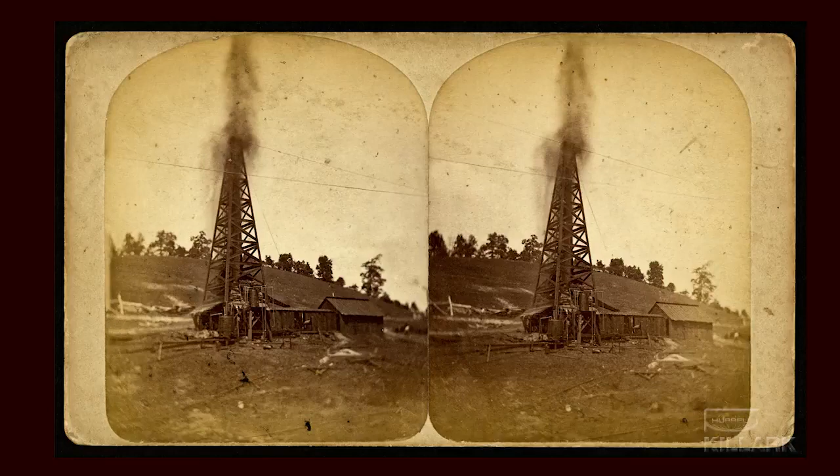Since the earliest days of harnessing the energy available from the commercial development of petroleum resources, understanding the science of fire and explosion has been critically important. Advancement in the process industries that deal with the extraction, refining, and transformation of petroleum, as well as a wide range of other flammable manufacturing materials, has created an ever-increasing demand for controlling the flammability risks.

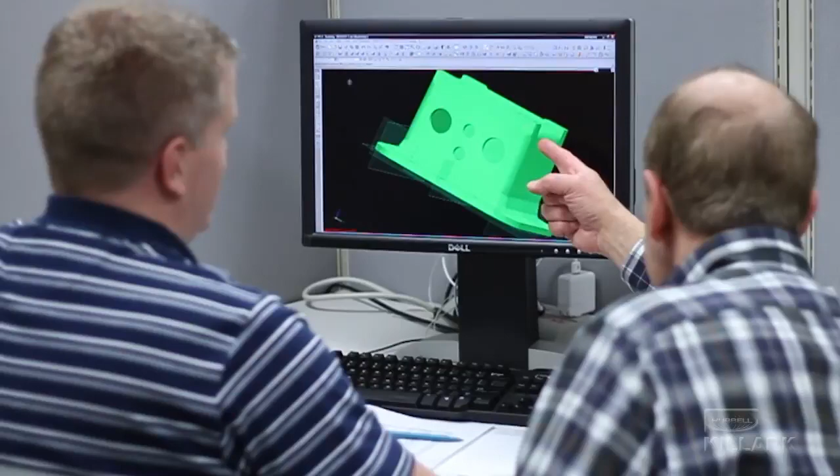One distinct area of concern has been that electrical equipment and its wiring could provide the source of ignition for explosive mixtures. Thoughtful engineering analysis, techniques, and specialty equipment would ultimately be required to effectively manage these risks.

Over the years, many industrialized nations worked within their own economies to develop a national consensus on how to evaluate and classify the risks associated with the extraction, processing, and handling of flammable materials in the presence of electrical systems. The United States, often in collaboration with Canada and Mexico, developed a comprehensive set of rules for evaluating and classifying the risk of ignition from electrical sources in those areas that could have explosive atmospheres. This activity also produced regulations for the techniques and equipment to be used for these installations.

They were then firmly aligned with the specialized product standards that were simultaneously being developed by consensus among industry engineers, technical committees, and third-party certification agencies. The North American approach for classifying the explosion and fire risks in these hazardous locations, frequently referred to as the class and division method, has been collected into a chapter of the National Electrical Code, or NEC, as well as corresponding Canadian and Mexican codes.

Meanwhile, there were also alternative methods being developed in other parts of the industrialized world for dealing with these locations. Certainly, the analysis of the actual risk of fire and explosion would yield the same fundamental results, regardless of approach. But it is the method of classifying the risks and the engineering solutions applied that would introduce additional options in the development of electrical systems.

Largely based on the work of CENELEC, the IEC created a series of standards for explosive atmospheres that have now been embraced in a revision of the Euronorm standards, including renumbering for consistency with the IEC documents.

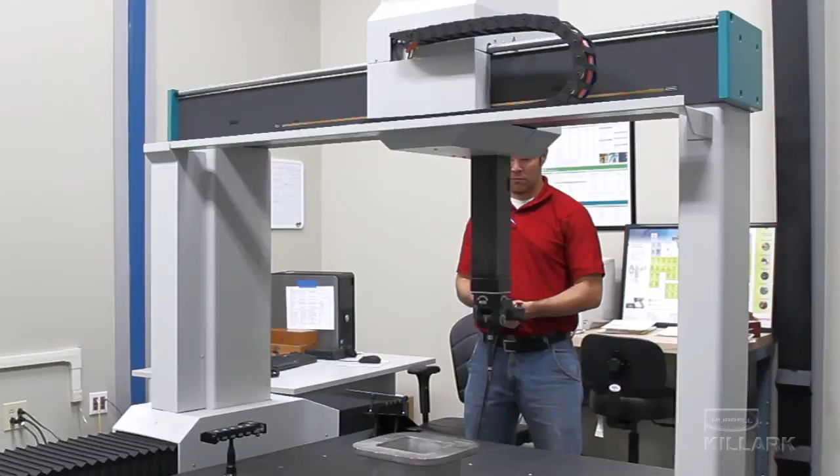An additional effort toward international harmonization was the creation of a comprehensive assessment program that could be used for implementation. Known as the IEC Ex scheme, it provides a structure for authorization of certification agencies, called notified bodies, to conduct examinations of products and manufacturing processes.

The notified bodies would also conduct evaluations of the manufacturer's quality systems and controls, including the scrutiny of follow-up audits. The all-important test reports and certificates of conformity issued by these agencies provide the documentation for product nameplates and marking.

Support for global harmonization continues to grow. The UN, through its European Economic Commission, promotes and encourages adoption of IEC standards and the IEC Ex certification scheme among the Commission's 56 member countries.

And in North America, IEC standardization has also received validation. Although the United States, Mexico, and Canada may be at different stages, revisions to each country's national standards over the past several years have included the path toward harmonization.

For the United States in particular, progress toward harmonization led to the adoption of two new articles in the National Electrical Code, Articles 505 and 506, as alternatives for treating hazardous locations. These articles are very much in line with IEC standards.

Part 2: Treating the hazardous location.

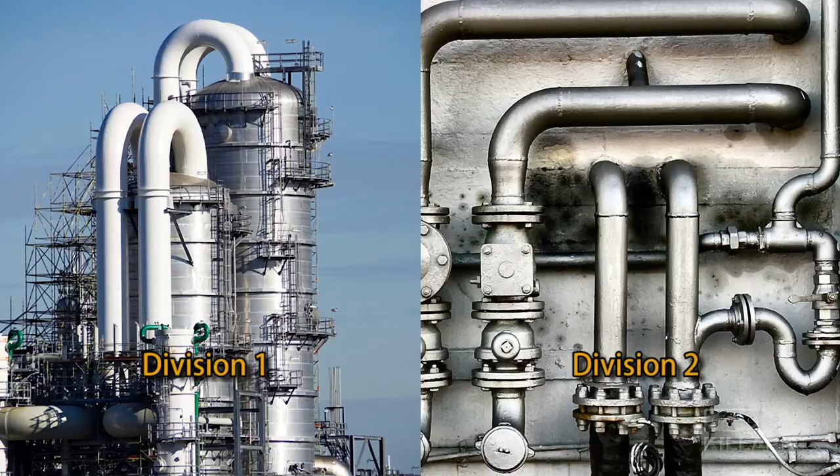The first, Division 1, includes locations where normal operations could permit the flammable material to form ignitable concentrations in the atmosphere, either some of the time or perhaps even all of the time. In contrast, Division 2 describes locations where hazardous materials are stored, handled, or processed in ways that are unlikely to create ignitable mixtures when everything is operating normally.

IEC 60079, the principal underlying standard for harmonization, uses a similar concept for categorizing risks, but it splits the risk of ignitable mixtures during normal operations into two separate categories. Calling the categories zones, the IEC approach starts with Zone 0, defined as those locations operating normally that could create ignitable concentrations of gases or vapors continuously or for long periods of time.

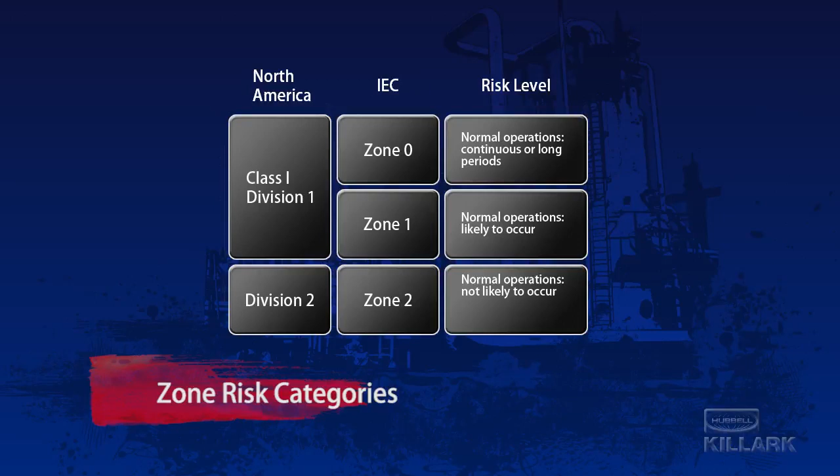Secondly, there is Zone 1. This zone could still be expected to create explosive concentrations during normal operations, but not often enough or long enough to require a Zone 0 designation. The final zone, Zone 2, is identical to its North American equivalent, Division 2. Explosive concentrations are not likely to exist in the atmosphere under normal operating conditions, but failure or abnormal circumstances could cause a temporary risk of a flammable atmosphere.

While the intention of the risk categories is certainly clear enough, those with the responsibility for conducting site evaluations or plan reviews to determine which risk category should be assigned often prefer to use a more quantitative analysis. There are unofficial numeric parameters that frequently serve as guidelines in the classification process.

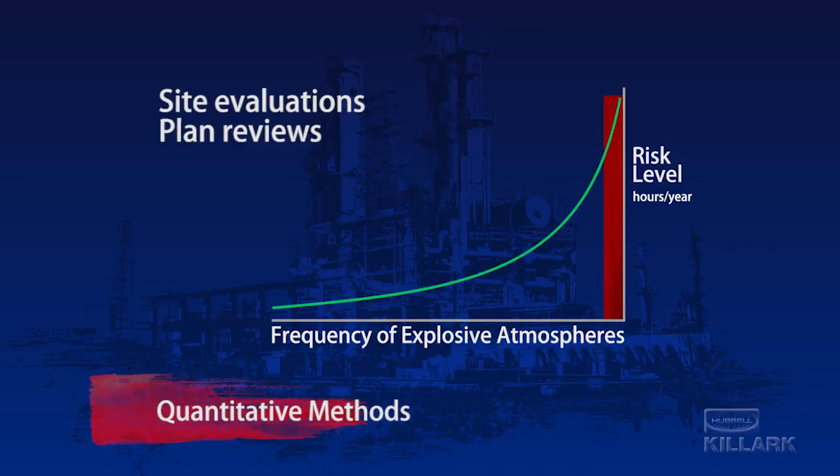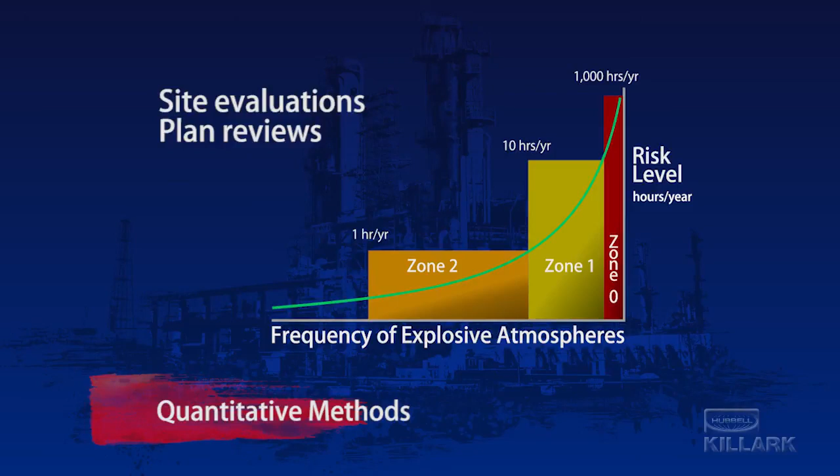When the occurrence of ignitable atmospheres exceeds 1,000 hours per year, the risk would be judged to be Zone 0. Locations considered Zone 1 could experience explosive atmospheres between 10 and 1,000 hours per year. When the issues occur less than 10 hours per year, the designation would be Zone 2. Of course, these parameters must be adapted to local practices, experience, and circumstances.

Since it has a very important impact on the equipment that will be selected for the application, the risk analysis or classification of the hazardous location must also include information about the nature of the hazardous material that could be present in the atmosphere. Gases, vapors, and flammable liquids are assigned to groups based on the similarity of their explosion characteristics to the typical material used to represent the group. Within the North American class and division system, Group A is represented by acetylene, Group B by hydrogen, Group C by ethylene, and Group D includes materials comparable to propane.

The zone system has a similar method for dividing these hazardous materials into groups using the same explosive properties, but the letter designations are the reverse of those used with divisions. In this case, both acetylene and hydrogen-type materials are grouped together under the designation IIC. Materials similar to ethylene are Group IIB, and those with explosive characteristics corresponding to propane are designated IIA. The Roman numeral II, appearing before each letter, indicates that these groupings of gases and vapors are not the result of underground mining. The special requirements for mining use the Roman numeral I.

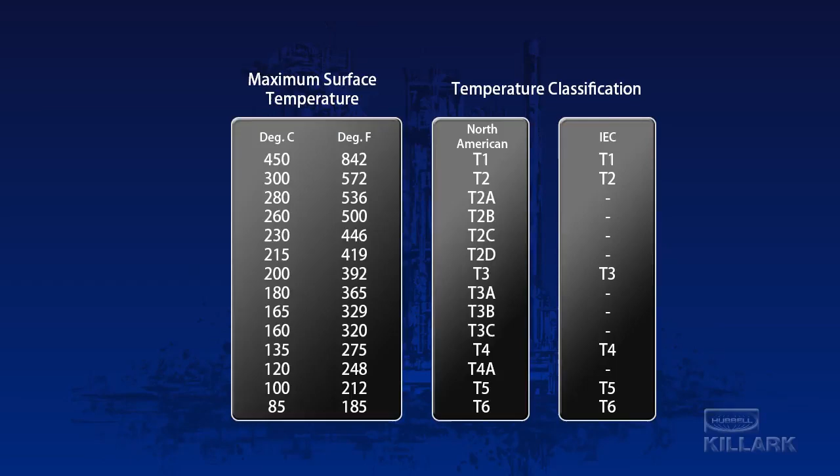Part 4. Methods of protection and equipment for gases and vapors.

Recalling that the fire triangle brings together the three essential components for combustion to occur—fuel, oxygen in the air, and a source of ignition—it is now possible to begin addressing the explosion potential identified during the risk analysis. A variety of approaches are available for the design of these specialized electrical installations, made possible by alternative protection techniques that provide equipment options for specific hazardous locations. The range of protection techniques can restrict the presence of the combustible mixture, isolate or reduce the energy of the source of ignition, or safely contain or quench combustion that could be initiated by the electrical device.

Within these general approaches, there are four basic concepts of protection, each with one or more engineering solutions. The individual solutions have been assigned a simplified type symbol to make identification and specification easier and more consistent.

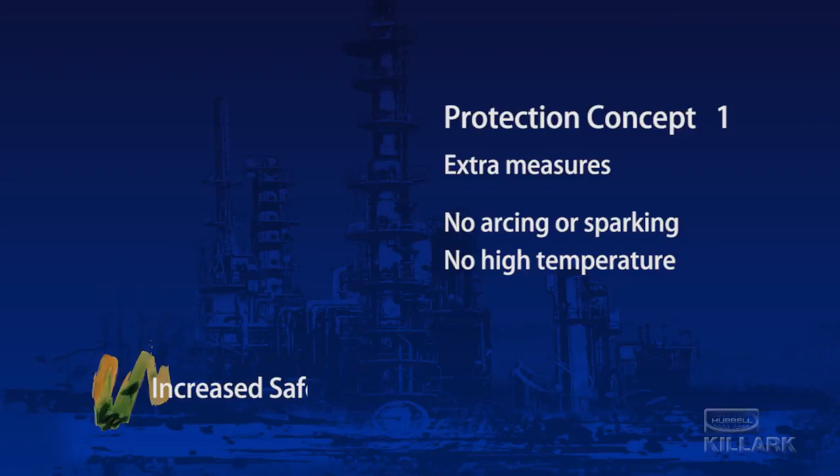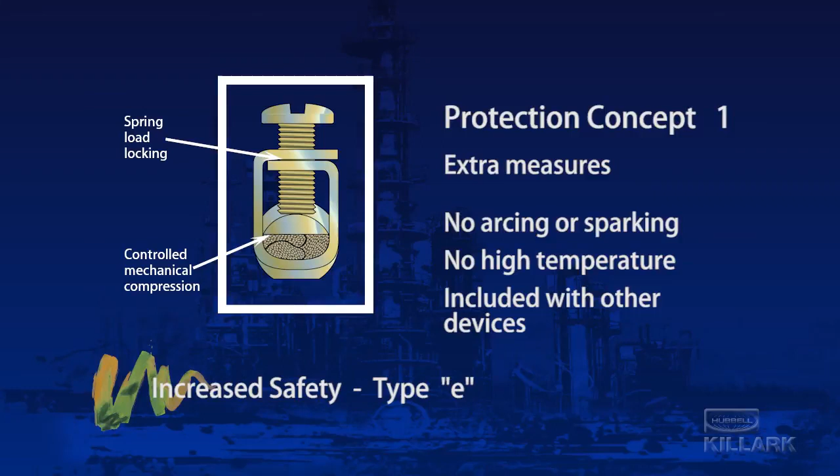The first concept includes equipment that has been constructed taking extra measures to produce no arcing, sparking, or high temperatures. These are known as increased safety devices, Type E. The use of additional clearances, spring-loaded terminations, and physical protection provide a method that can be applied to standalone terminal and connection boxes, or in conjunction with other methods such as those used for controls, motors, and lighting fixtures.

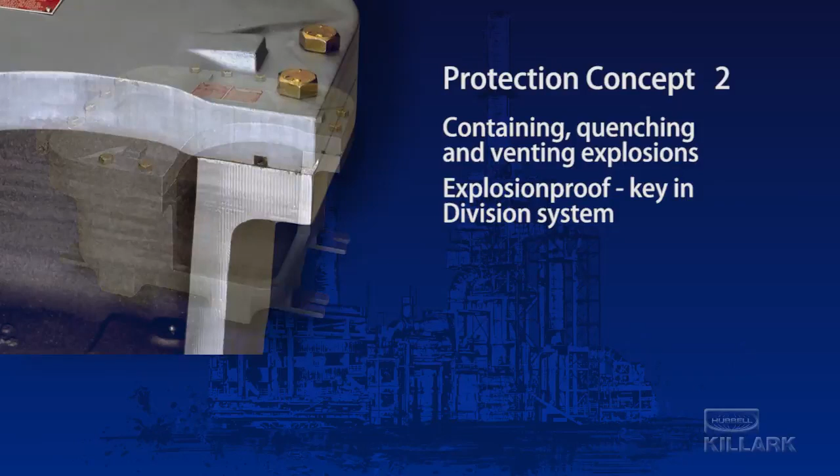Another approach has been developed around the concept of containing, quenching, and safely venting explosions that could occur when ignitable mixtures come in contact with arcing or high-temperature equipment. This concept includes explosion-proof enclosures, a major technique used in the division system. The enclosures are engineered with more than sufficient strength to contain an internal explosion of a specified gas, and are then able to vent the products of combustion to relieve the pressure, but only after they've been sufficiently cooled to prevent ignition of the surrounding atmosphere.

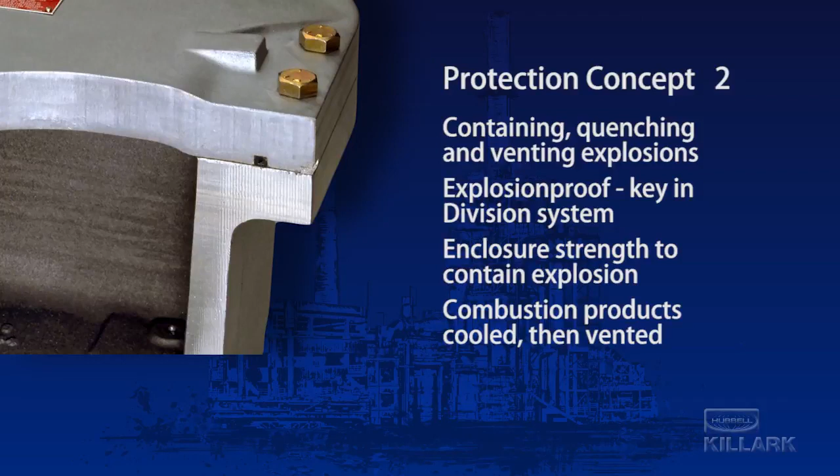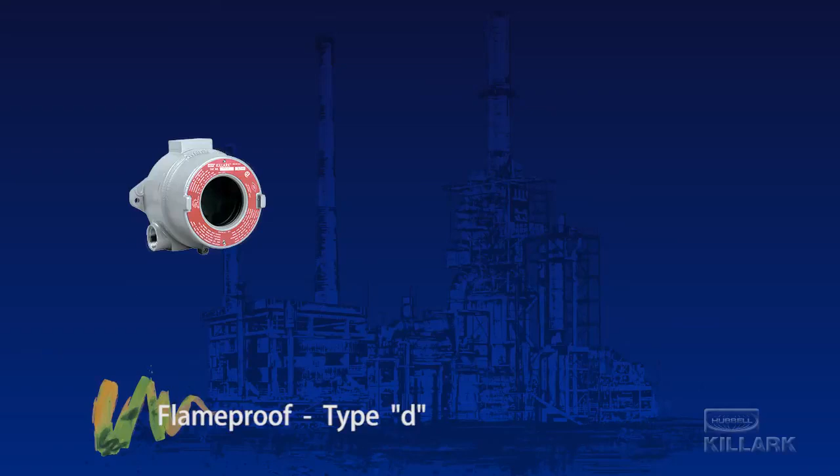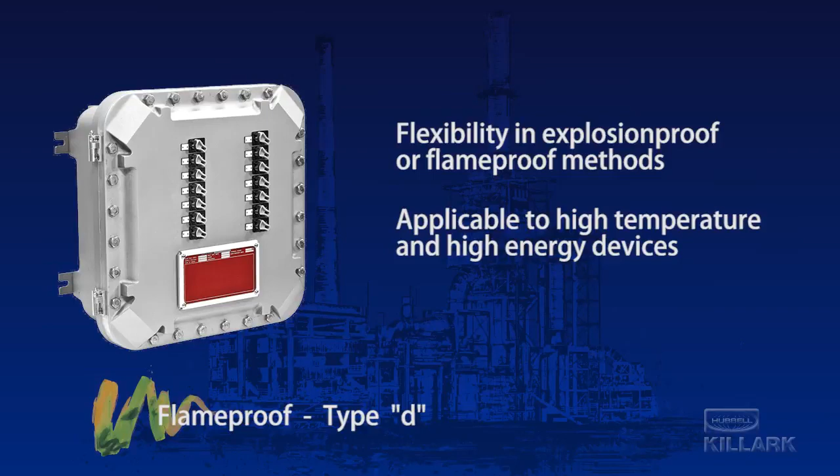The same technique is referred to as flame-proof in the IEC system and is designated Type D. Explosion-proof and flame-proof technologies have the flexibility to be applied to a wide range of equipment. This is especially important because it includes high-energy and high-temperature devices where alternative protection methods may be difficult or impossible to implement. The adaptability of flame-proof technology also allows it to be applied at the individual contact level. Enclosing the arcing device in its own miniaturized explosion-proof chamber with a flame path for venting permits a broader range of materials to be used for the fabrication of the overall assembly enclosures.

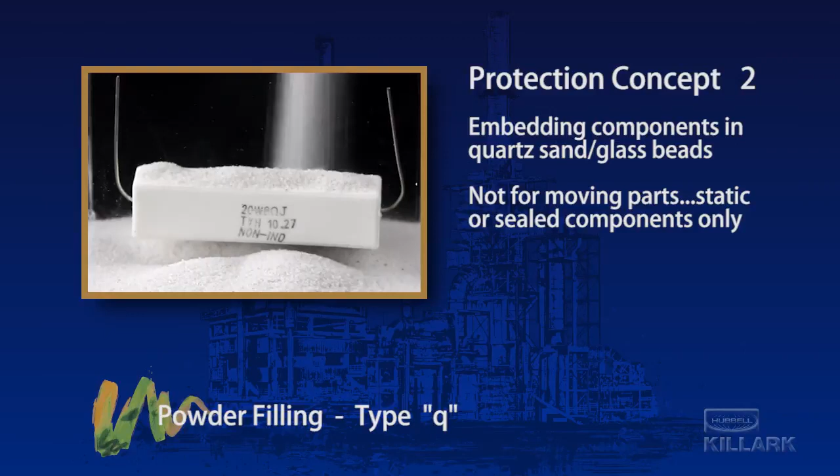Also included within this protection concept is powder or quartz filling, type Q. This technique relies on embedding the electrical source of ignition in specially refined quartz sand or glass beads. This is clearly not for devices with open moving parts, but fuses, transformers, and limited volume sealed components could be afforded protection with sufficient quartz powder surrounding them.

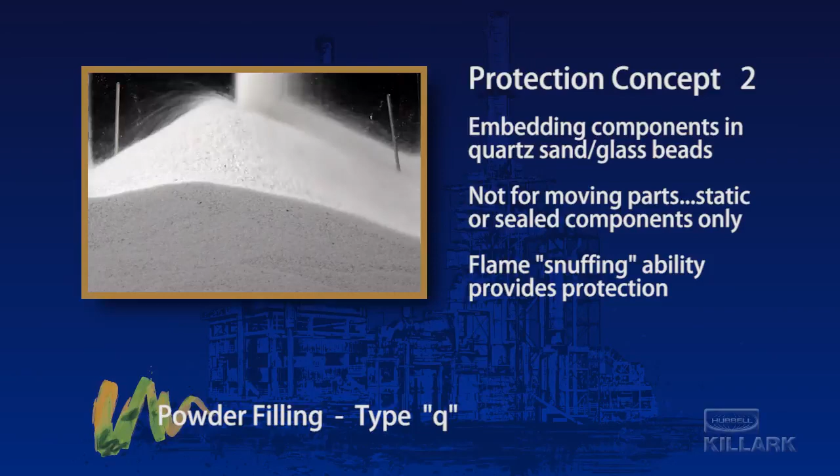No explosion or flame would propagate beyond the enclosure because of the snuffing qualities of the sand. Although this technique may be a satisfactory solution for certain design problems, it is not among the most common protection methods used. The next protection concept depends on limiting the amount of energy available in a component to below the level that is necessary to initiate an explosive reaction in a flammable atmosphere.

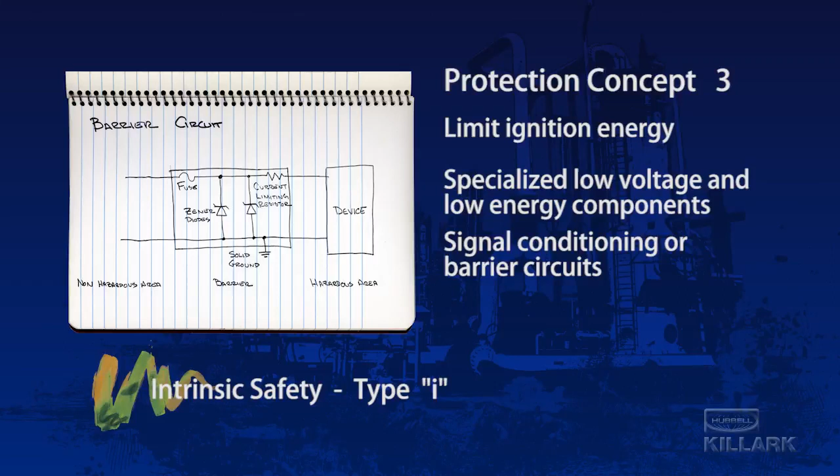Known as intrinsic safety, Type I, this technique uses specialized low-voltage components within the hazardous location and additional signal conditioning components outside of the hazardous boundary or in flame-proof enclosures. This approach effectively removes the ignition leg of the fire triangle. Because of the exceptionally low energy levels allowed, intrinsic safety is generally restricted to control, sensing, reporting, and data applications.

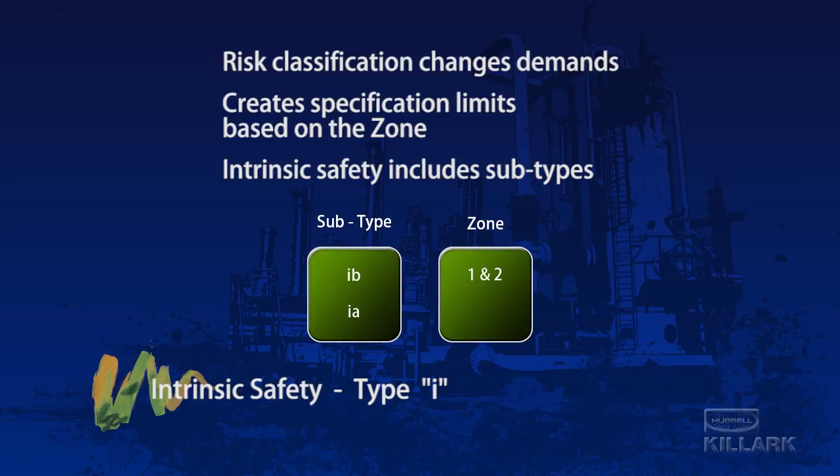Each risk classification places different demands on the equipment and confines certain technologies to particular zones. In the case of intrinsic safety, there are subtypes that have been targeted toward the particular risk. Type IB is intended for use in Zone 1 and 2 applications. Type IA is permitted for use in Zone 0, in addition to Zones 1 and 2.

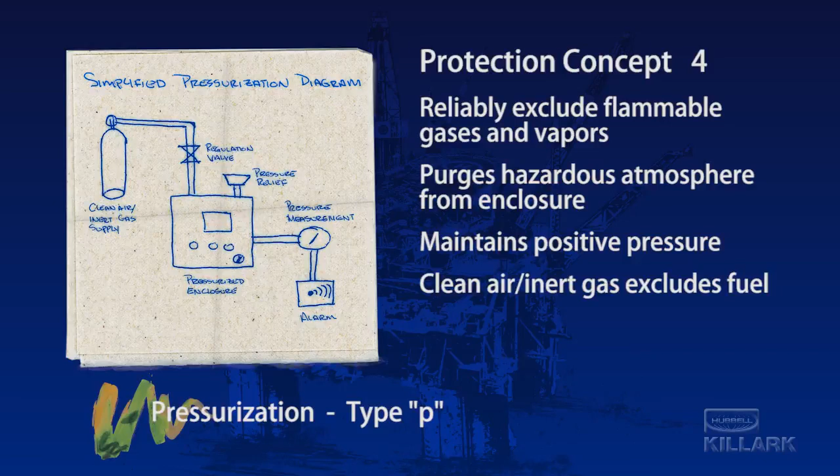The final concept employs designs and procedures intended to prevent the flammable gases or vapors from coming in contact with a potential source of ignition. Pressurization is an engineering technique that purges the combustible atmosphere from the apparatus enclosure and maintains positive pressure within the enclosure throughout the time that it is energized. Using blowers with a source of clean air, compressed air, or bottled inert gas, the positive pressure prevents the entrance of the ignitable material.

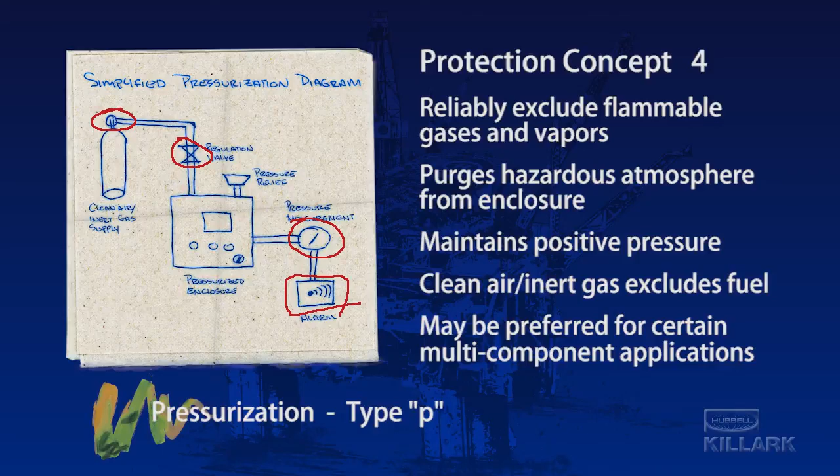The operating, pressure sensing, measurement, and alarm features that must work together to provide Type P pressurization can be quite complex. However, this can be the preferred method for creating overall protection in multi-component power and control panels, as well as entire control rooms. The subtypes PX, PY, and PZ indicate the level of reduction in the explosion risk achieved by each of the pressurization designs.

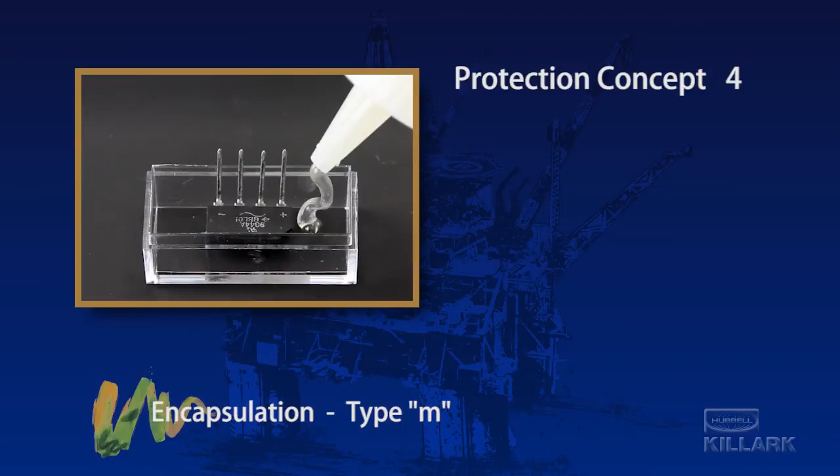Also within this concept is encapsulation, Type M, a fabrication technique that primarily provides protection for solid-state electronic components and several types of circuit boards. Certain sealed devices containing limited volumes with constrained temperatures may also be encapsulated. A variety of compounds, epoxy resin, for example, would be used in the initial fabrication process or in a potting procedure following assembly of the manufactured components.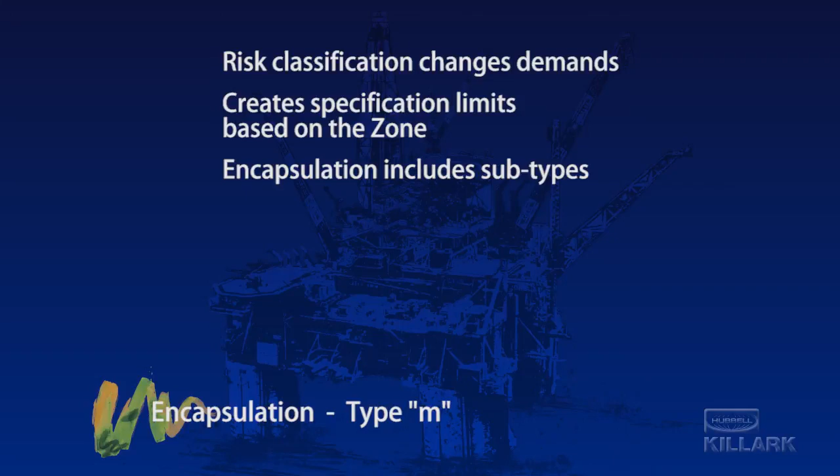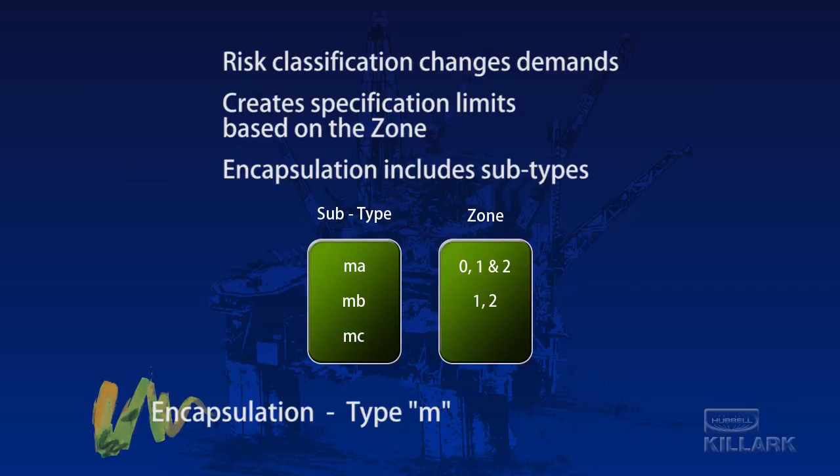Similar to intrinsic safety, a second letter is used to identify the zone applications allowed for the equipment. MA is permissible for all zones. MB is for Zone 1 and 2, while MC may only be installed in Zone 2.

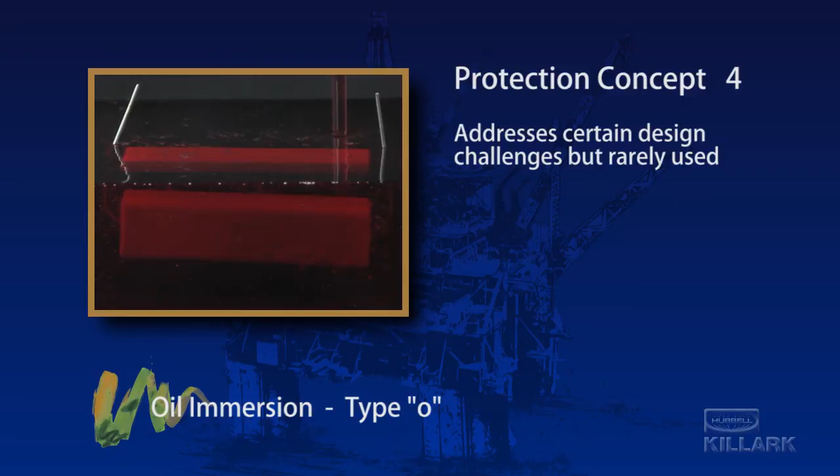An additional technique within this concept is oil immersion, Type O. Although a rarely used type of protection, there are some pieces of equipment that may present challenges that can be more easily overcome by using non-flammable oils to submerge the apparatus. The oil surrounding the device prevents the hazardous material from coming into contact with the source of ignition. It may also be called upon for cooling. Transformers and other static devices, as well as certain startup equipment, could employ oil immersion.

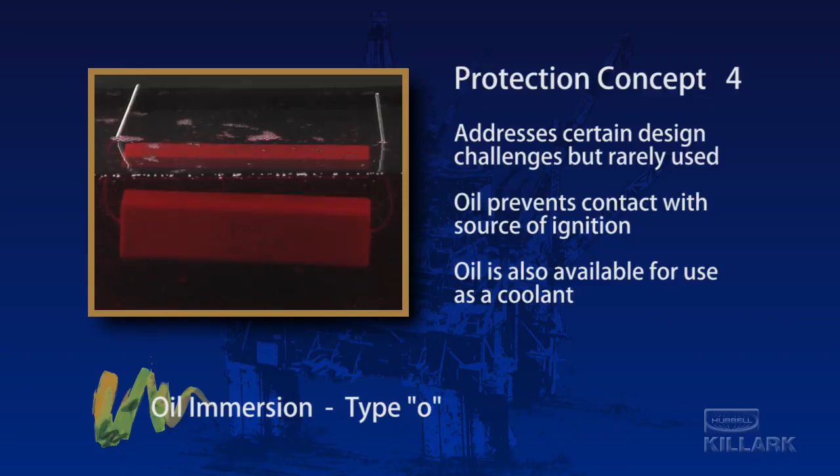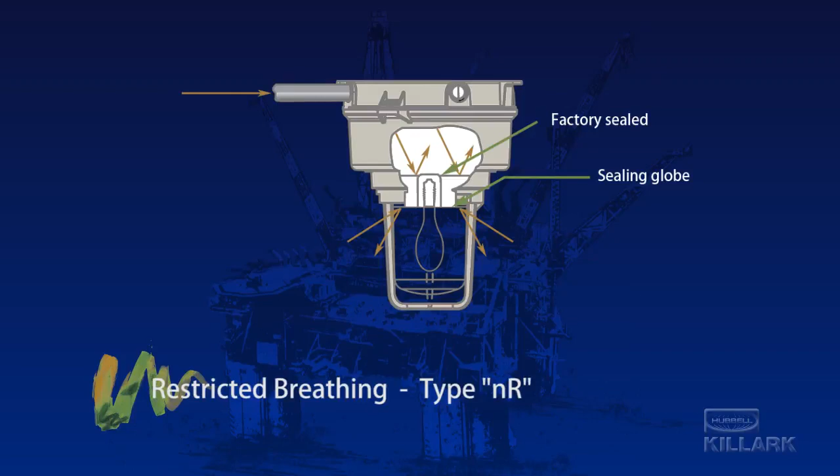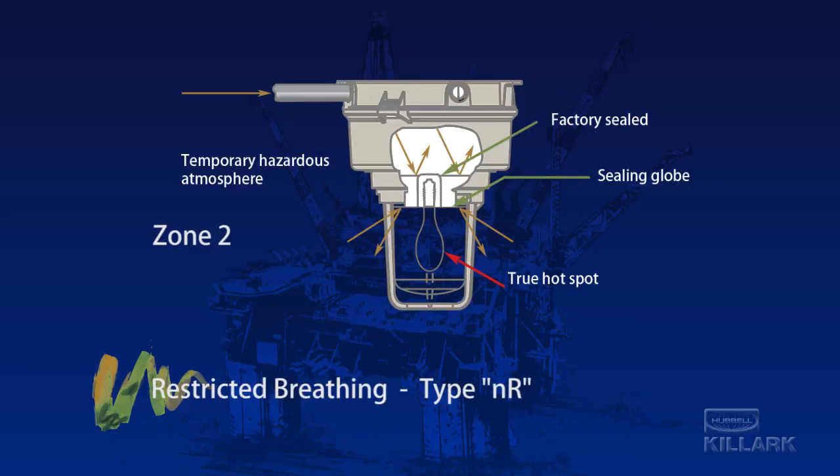Restricted breathing, designated NR, is a method of sealing and control for use in Zone 2 that has become particularly important in the design of lighting fixtures and other heat-producing devices. The extra measures used to prevent the entrance of gases and vapors from a short-duration flammable atmosphere that could occur in Zone 2 protect against developing explosive concentrations near elevated thermal points within the equipment. Testing for the temperature codes that will be assigned to the NR equipment can now be based on the cooler surfaces of the restricted breathing envelope.

Both ATEX and the IEC differentiate among the types of protection to reflect the degree of ignition risk for each method. This is to clarify the zone for which each type and subtype is suitable.

ATEX uses categories and defines Category 1 as equipment types with a very high degree of safety, including the anticipation of 2 independent failures. Category 2 provides a high degree of safety, even when a single failure occurs. Category 3 equipment would be designed with a normal or standard degree of safety. The letter G is used with the categories to make it clear that the degrees of safety are based on a gas or vapor hazard.

The IEC uses nearly the same definitions for determining its Equipment Protection Level, or EPL. However, in the case of the IEC, the same letter designations are used for the different levels of protection that are also used for intrinsic safety and encapsulation.

Equipment Protection Level A is a very high protection level. EPL-B is a high level of protection, and EPL-C is a standard or normal level. Again, the addition of the letter G indicates a gas or vapor hazard.

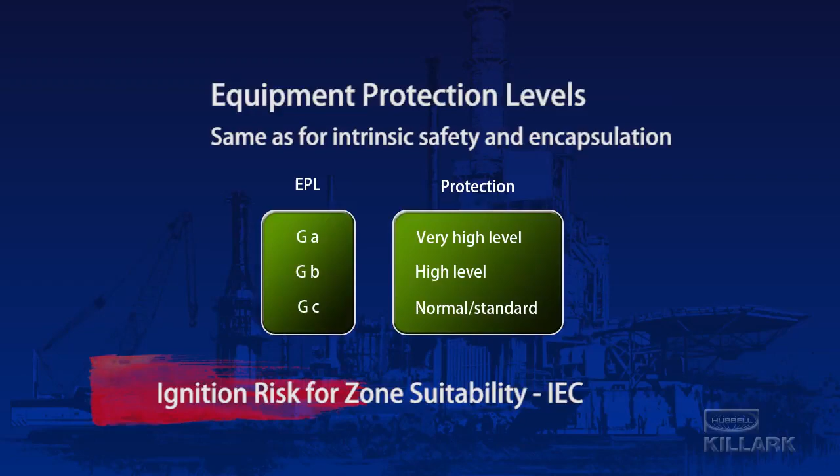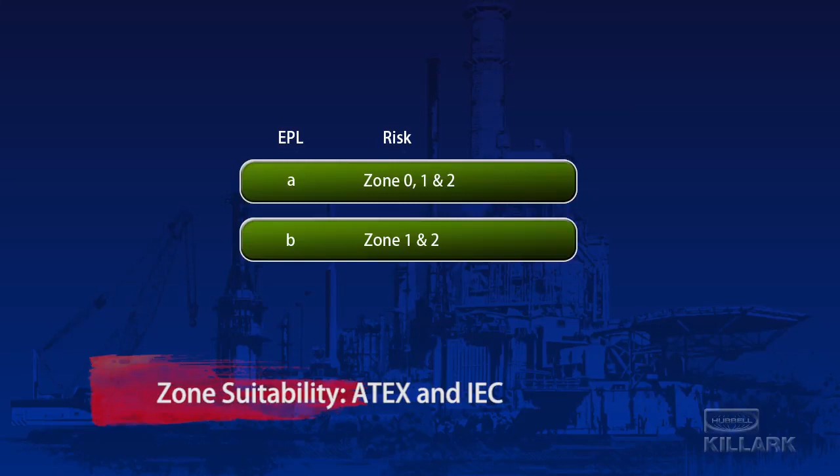An EPL of A may be installed in all of the zones. An EPL-B is not intended for use in Zone 0, but may be used in Zones 1 and 2. EPL-C is limited to Zone 2. This parallels the use of ATEX categories 1, 2, and 3.

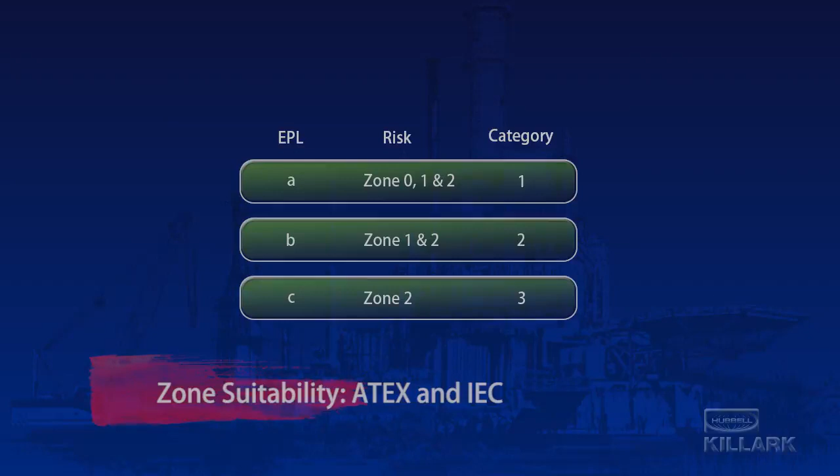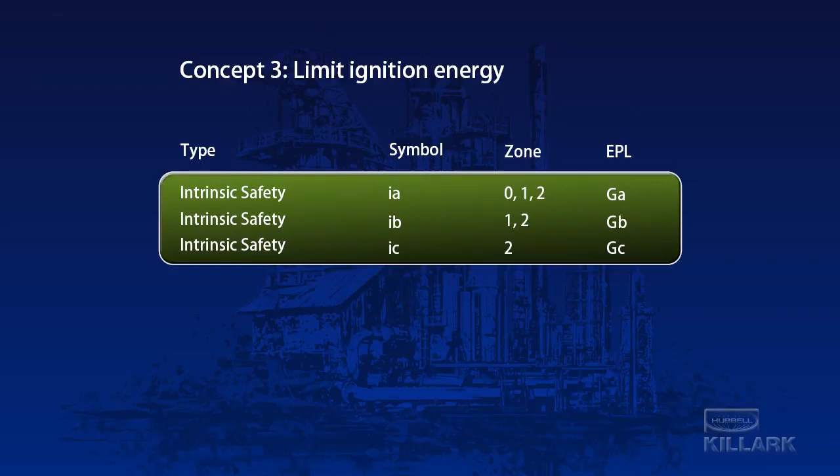Each of the protection technologies is assigned an EPL for its highest safety level. Protection types intended for a particular zone may be used in a zone of lower risk. There is a consistent relationship among each of the risk assessment zones, protection types, and equipment protection levels for non-mining environments, where gases, vapors, or atomized flammable liquids could create explosive mixtures in the atmosphere.

Part 5. Risk Analysis for Combustible Dusts.

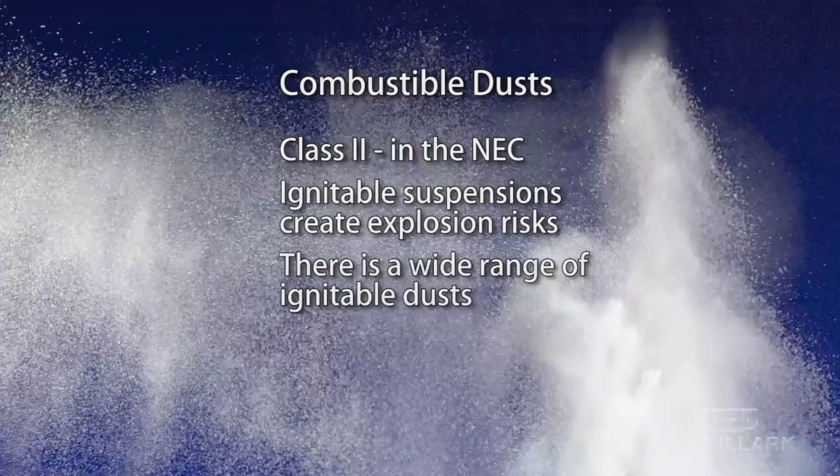Another class of risk requiring assessment for explosion potential is combustible dusts. Referred to as Class 2 in the North American approach, finely milled, ground, or pulverized organic material, like wheat, wood, and coal dusts, can be just as explosive as gases and vapors when suspended in the atmosphere. Certain inorganic materials, metal dusts, for example, could also form ignitable suspensions.

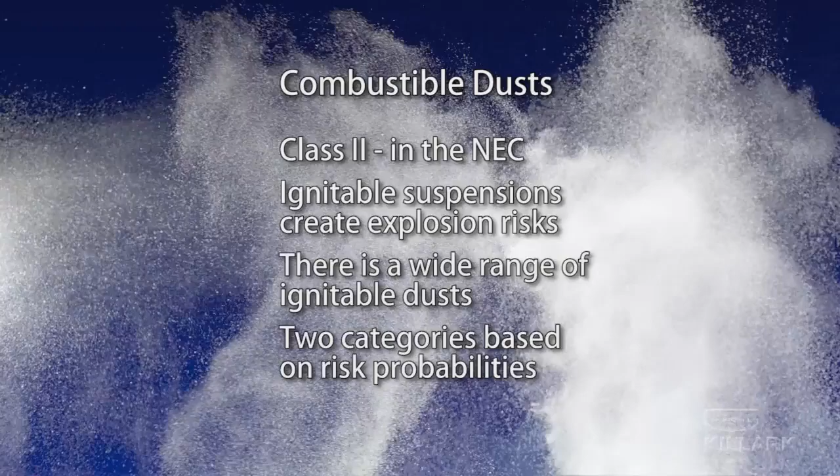The North American system again separates the explosive risks into 2 divisions. Division 1 is where normal operations could produce an ignitable suspension of dust continuously or at least some of the time. In Division 2, it is unlikely that an explosive concentration of dust would occur during normal operations.

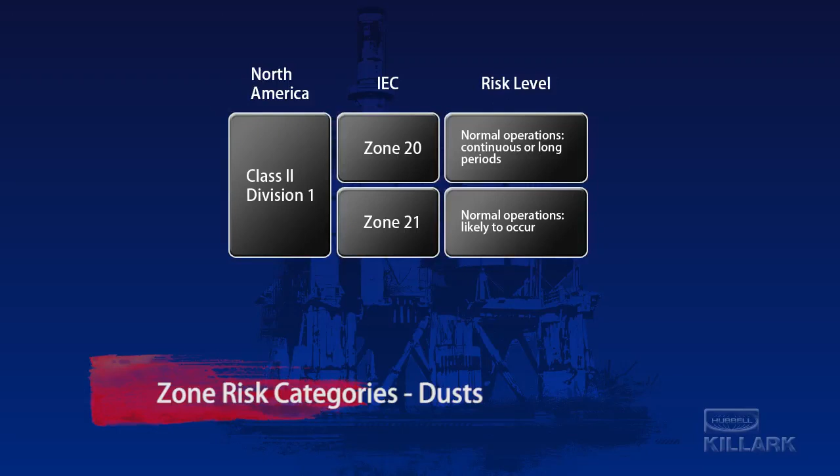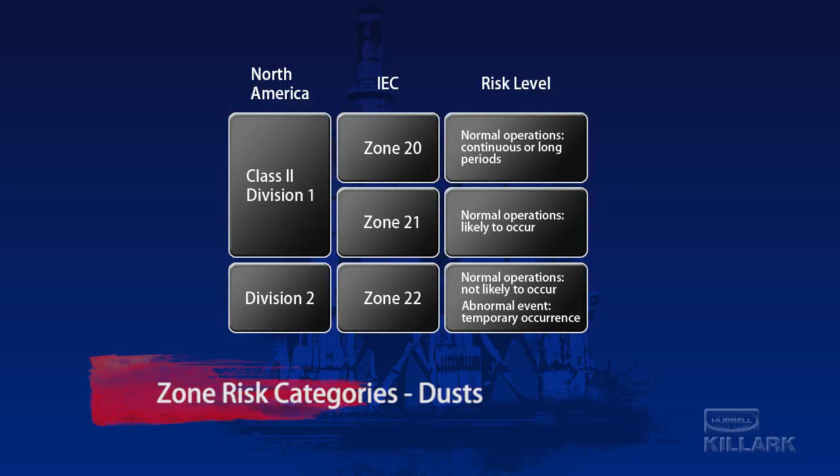Similar to the treatment of gases and vapors, the IEC creates 3 zones for risk assessment. Zone 20 covers risks of ignitable concentrations of dust that normal operations could produce continuously or for long duration. The risk in Zone 21 is considered less severe and is defined as an explosive dust suspension being only likely during normal operations. In Zone 22, the risk of ignitable concentrations is unlikely under normal circumstances, but it's possible that an accident in the storage or handling of the material, for instance, could generate an ignitable cloud.

The characteristics of various dusts also require groupings in the assessment of their potential behavior. In the division system, Group E contains metal dusts. Because of the conductivity of metallic dust, there is a special assessment rule that they must always be designated Division 1 under the North American approach.

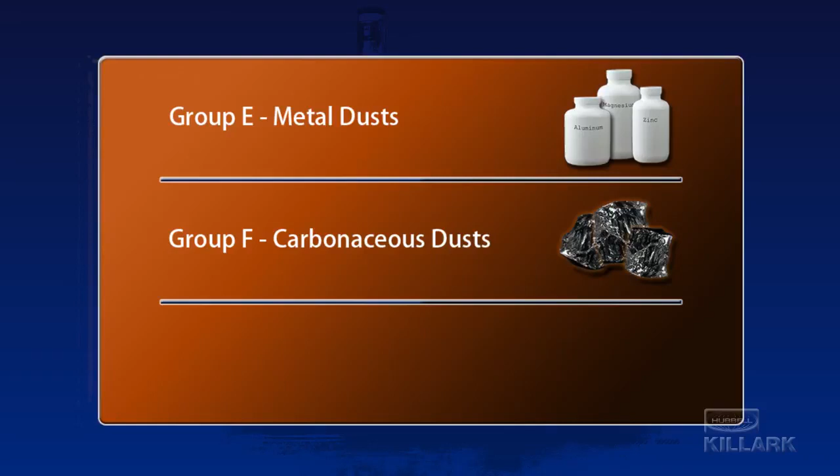Group F includes solid fossil fuels and or similar carbonaceous material, such as coal and coke dusts. Group G covers grain and other agricultural dusts that are created during the processing and handling of products like wheat, rice, and corn. The IEC also uses groups based on material characteristics.

The groups assigned for dusts are preceded with the Roman numeral 3. Remember, this is part of the series where Roman numeral 1 identifies explosive byproducts found during mining, and Roman numeral 2 designates non-mining gases, vapors, and flammable liquids.

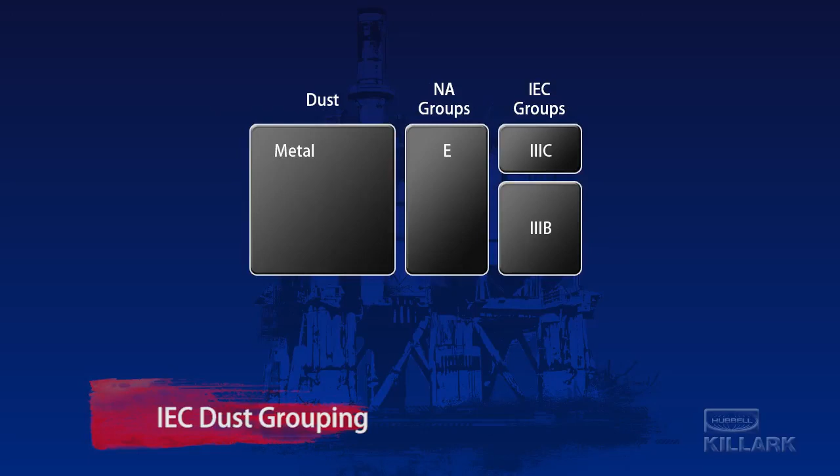Again, in seemingly reverse order from the division system, Group 3C includes conductive dusts. Group 3B covers non-conductive dusts and combines groups F and G from the division system.

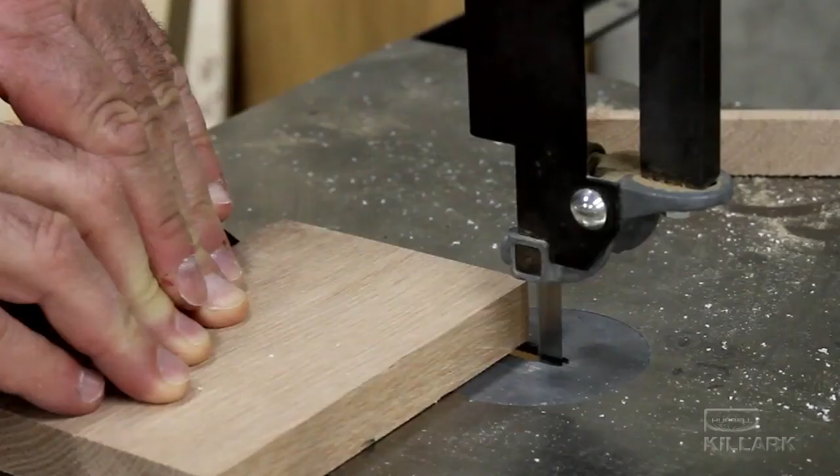Rather than finely pulverized dust, IEC Group 3A contains flammable fibers and flyings that might, for instance, be found in a woodworking plant or a textile mill. In these situations, the concern is more about an easily ignited and rapidly burning fire than an explosion.

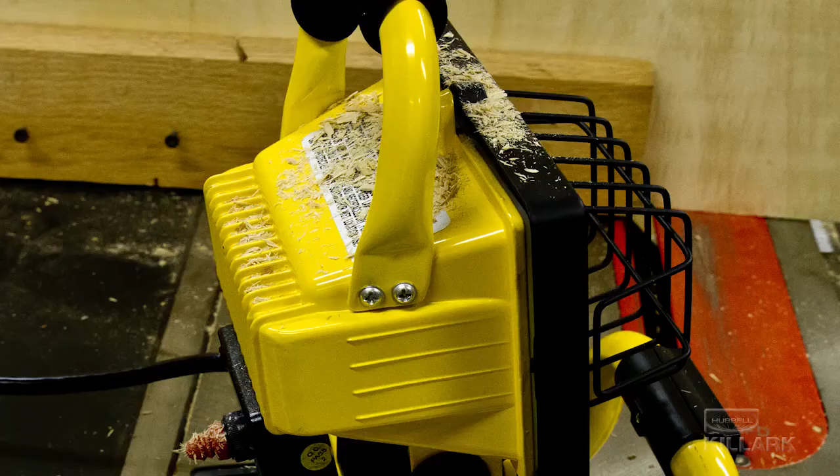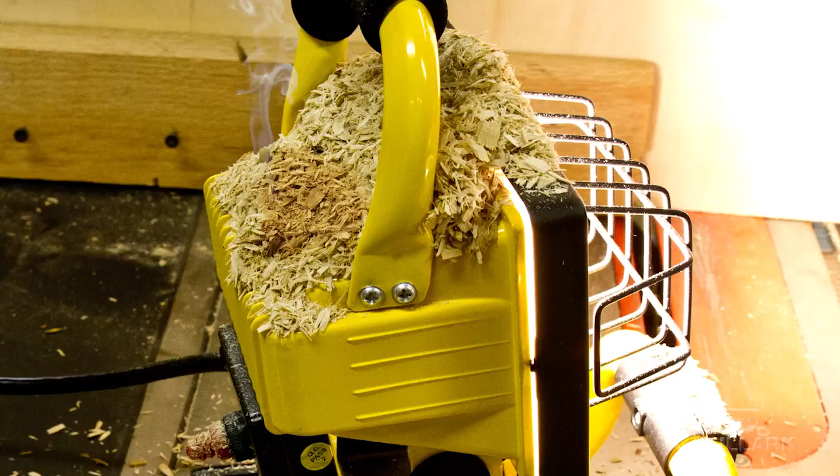The buildup of fibers and flyings on electrical equipment might result in elevated temperatures that could be high enough to initiate an unexpected fire, or even lead to spontaneous combustion as the material ages under thermal stress. This particular IEC group incorporates and consolidates the North American treatment and classification of fibers and flyings known as Class 3.

As with all aspects of dealing with hazardous locations, temperature information is critical to the risk management process and product selection. Controlled testing provides the essential data on the thermal behavior of the equipment.

Part 6. Methods of protection and equipment for combustible dusts.

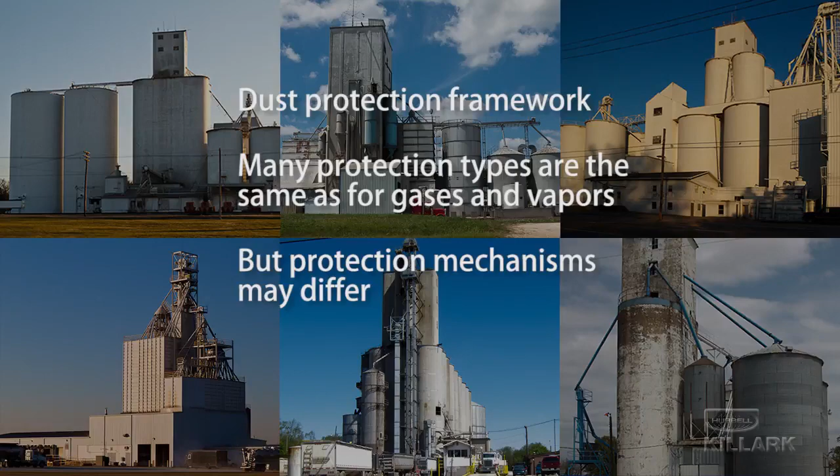A framework very much like the one used to explain and label the protection types used for gases and vapors has also been devised for dust environments. In fact, many of the gas and vapor protection types are also available to guard against the risks of dust explosion or fire from fibers and flyings. However, it is important to be aware that the actual protection mechanism may rely on a somewhat different concept for the dust risk than with gas and vapor.

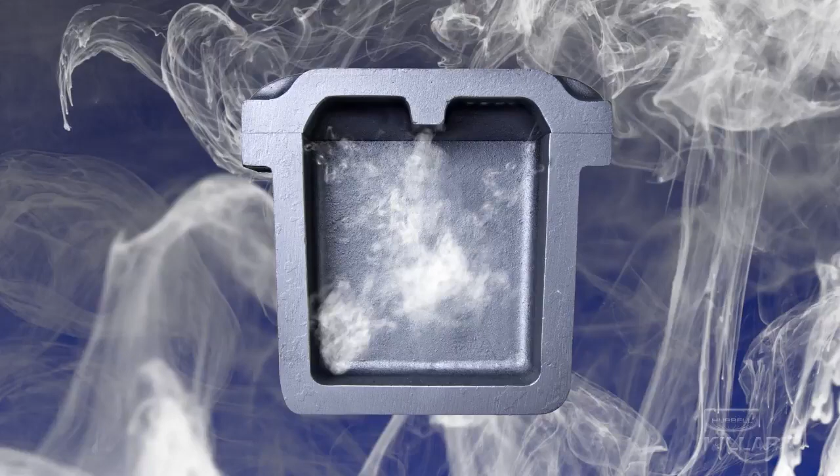The fluidity and compressibility of free gases and vapors will permit their inevitable migration and seepage into spaces and equipment, unless very specific and robust design measures are taken to prevent it.

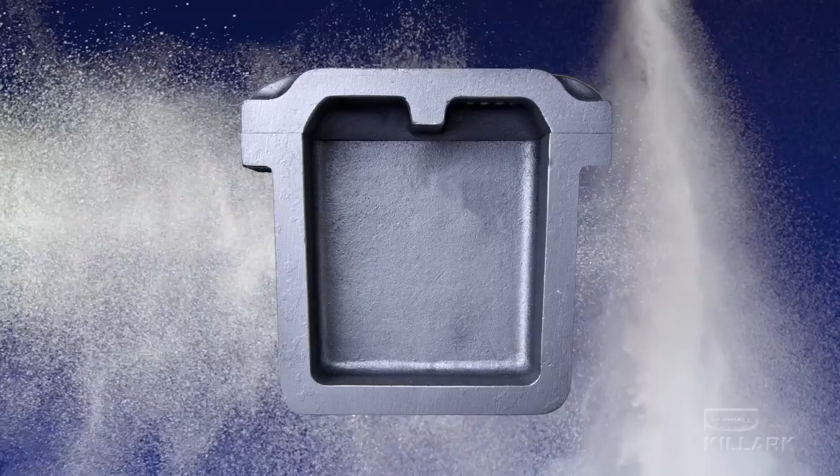In contrast, the physical nature of dust permits a more inherent reliance on tightly assembled or firmly gasketed enclosures to seal dust away from electrical components.

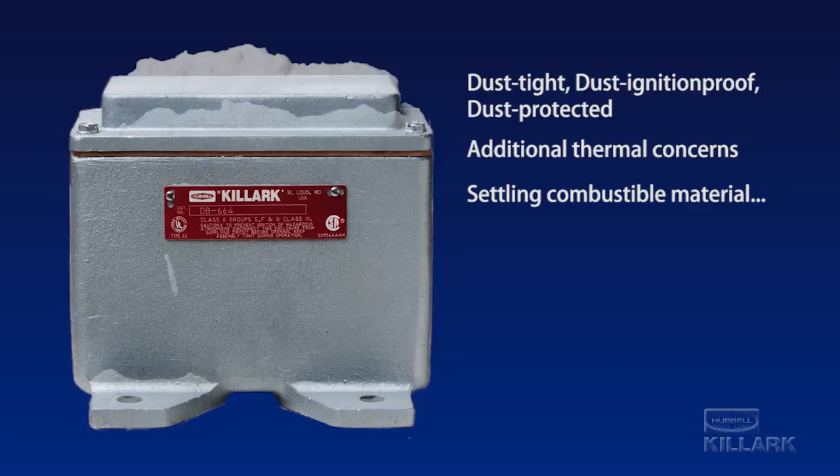This increased dependence on dust-tight, dust-ignition-proof, and dust-protected housings to address the risk of explosive dust clouds introduces additional thermal concerns. Despite maintenance and housekeeping programs that may be in place at dust-producing facilities, the assumption must be made that combustible material could settle on electrical enclosures and apparatus.

The resulting dust blanket could cause internal devices to operate at elevated temperatures, even under normal operating conditions. Additional engineering considerations are required to deal with the impact of the dust blanket by both the equipment manufacturer and the user.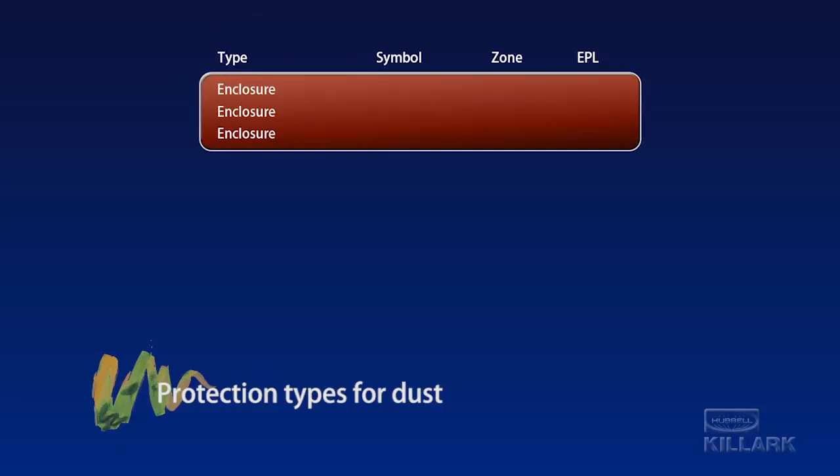The all-important dust protection by enclosure, Type T, is added to the table, along with the other now familiar protection techniques. Type T dust protection also has the added EPL of A, B, or C to designate whether the equipment is intended for Zone 20, 21, or 22.

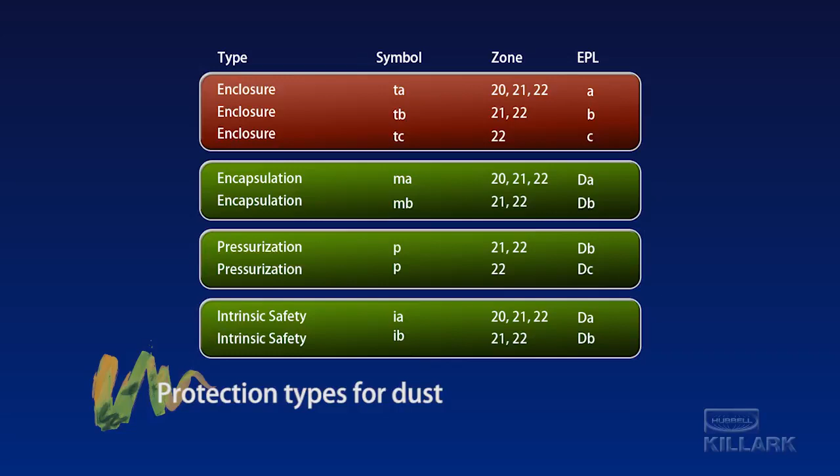One additional but intuitive difference that is also quickly apparent in the table is that the designation G, used with the EPLs for application in the gas and vapor risk zones, has been replaced with the letter D for dust.

Part 7. Ingress protection, preventing physical interference.

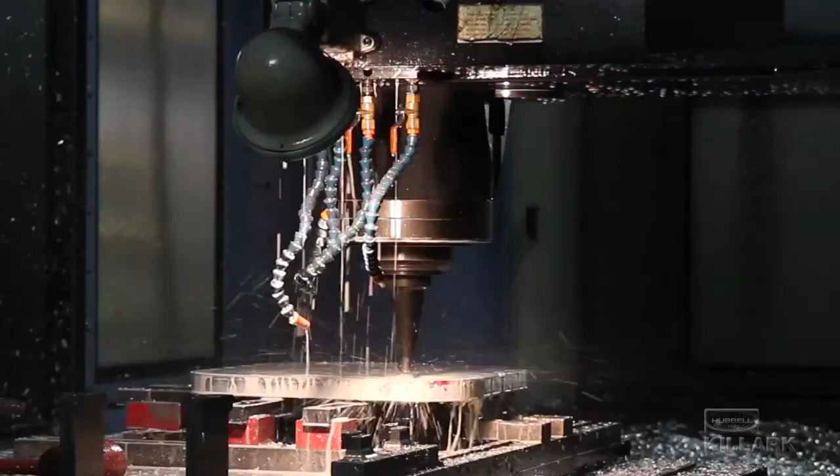The need to pay particular care to construction has always been integral to the design of explosion-proof and flame-proof enclosures. But many of the alternative protection types also depend on the design and integrity of the housing to prevent physical interference or the entrance of water or foreign matter that could defeat the equipment or component protection.

In North America, designations such as NEMA 3 for rain-tight, NEMA 4 for hose-down, and NEMA 6 for submersible are typical of the environmental and physical protection ratings used for enclosures.

Ingress protection, or IP, is the rating system standardized by the IEC. It uses a 2-digit code to assure that the proper physical safeguards are in place for the EX protection type selected and its environment.

The first digit following the IP designation denotes the extent to which the internal components are shielded from inadvertent or intentional access or foreign objects. The numbers range from a low of 0 with no physical safeguards provided up to level 6, which is fully dust-tight and prevents access even with a probe as small as a fine wire.

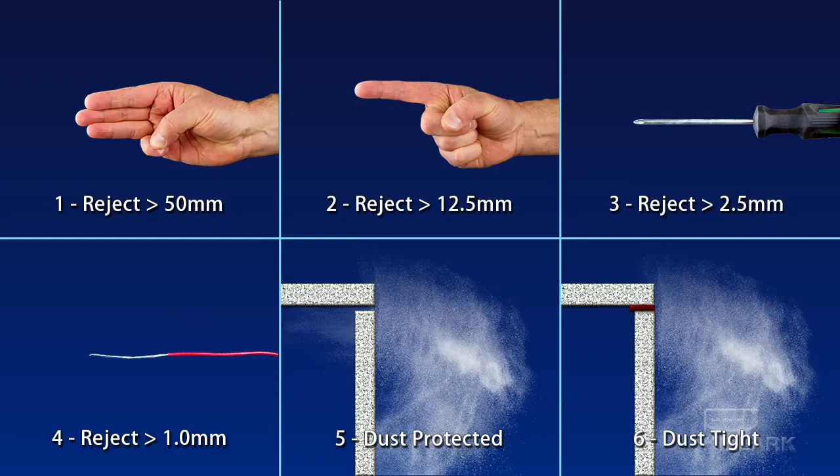The second digit signifies the degree of protection afforded against the entry of water. In this case, there are 8 levels of entry safeguards, ranging all the way through protection from continuous submersion in depths greater than 1 meter.

Examples of typical ingress protection ratings would be IP54, for an enclosure that is protected from dust as well as water splashing from any direction, neither of which could enter in a sufficient amount to cause harm.

An IP66 rating would mean that the enclosure would allow no dust to enter. It is fully dust-tight, and powerful water jets or heavy seas would have no effect.

If the rating were raised to IP67, the enclosure would also be able to protect the equipment from immersion in shallow water for a short period of time, less than 30 minutes.

Because the laboratory testing is not identical, and NEMA includes additional environmental factors, it isn't possible to exactly match NEMA protection types with IP ratings. But as a rough equivalent, the IP54 safeguards would be similar to NEMA 3, IP66 to NEMA 4 and 4X, and the IP67 would parallel NEMA 6.

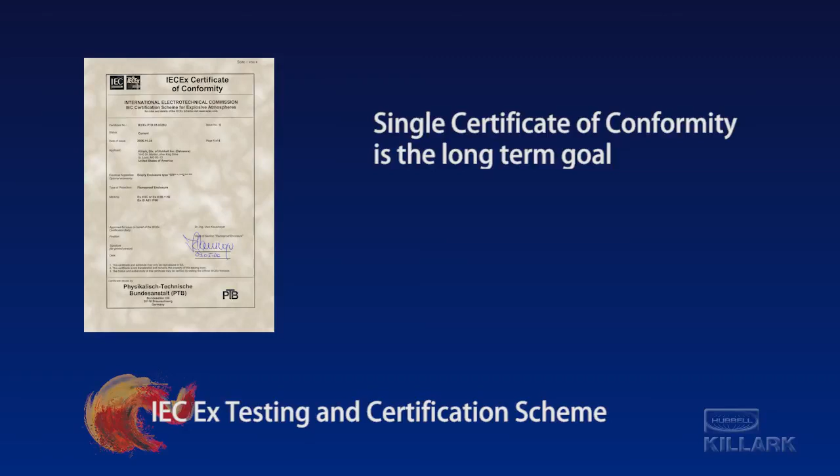The scheme also included an assessment system to evaluate a manufacturer's quality program, procedures, and documentation, as well as assurances of continuing audits. While acceptance of a single certificate of conformity still remains the objective, it is a work in progress, with only a small number of countries currently accepting the COCs without additional local documentation. However, test reports issued by laboratories certified under the IEC EX scheme are widely accepted as the assessment basis for the locally generated certificates.

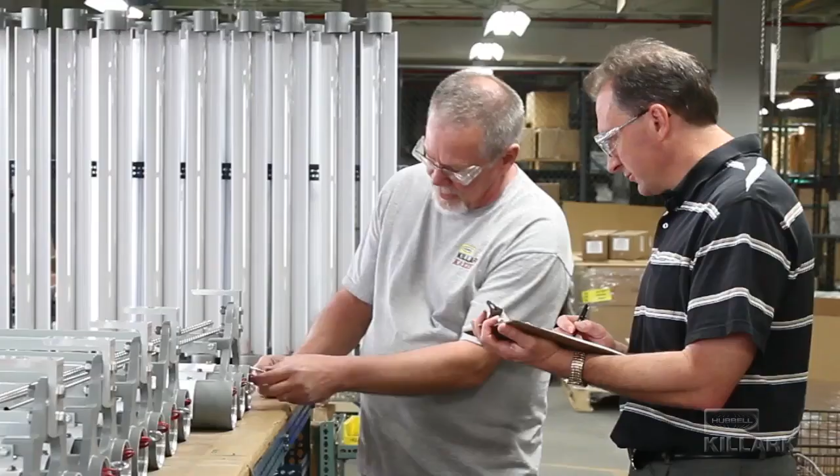The assessment of manufacturing facilities, procedures, and internal documentation must also be conducted by an agency approved to conduct that appraisal, known as a notified body. The Quality Assessment Report, or QAR, that they complete is an integral part of the product certification process. The actual product examination takes place in addition to the thorough testing that a company like Killark conducts on its own.

It can involve explosion tests, hydrostatic pressure measurements, and thermal evaluations. Additional chemical resistance analysis, electrical performance trials, dust penetration reviews, and endurance trials would be included. Also, hose down, static discharge, and induced failure investigations, along with any other assessments that may be called for by the EX scheme, would be performed.

Once all of the tests and analyses have been completed, they are reviewed by the agency's engineering staff, and then the notified body will endorse the QAR, and then issue the final test report and the certificate of conformity.

The importance of the IEC EX scheme has continued to grow. 30 member countries are involved in the management of the IEC EX scheme, with more than two-thirds having one or more recognized laboratories. And with endorsement by the UN, even more countries are relying on the scheme.

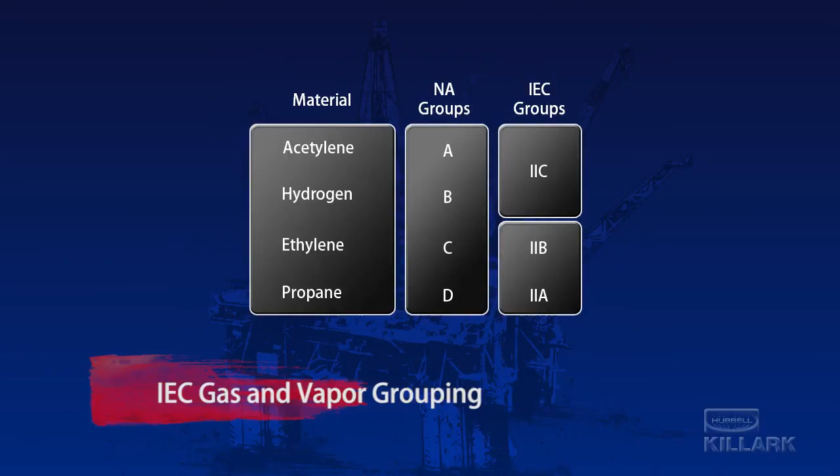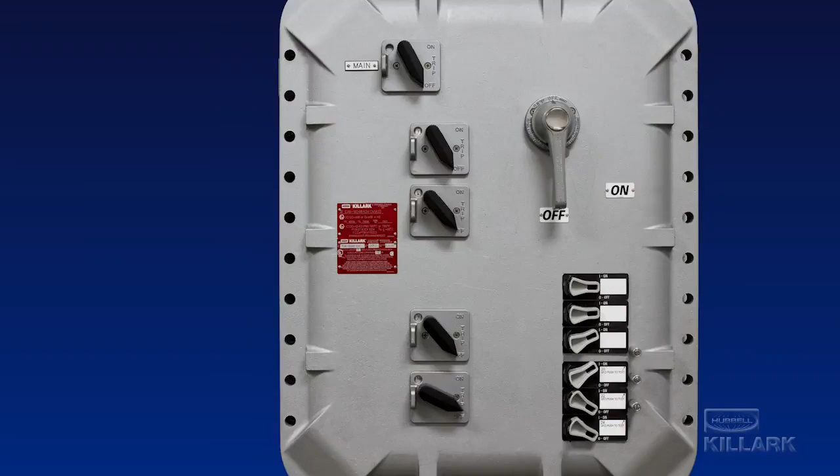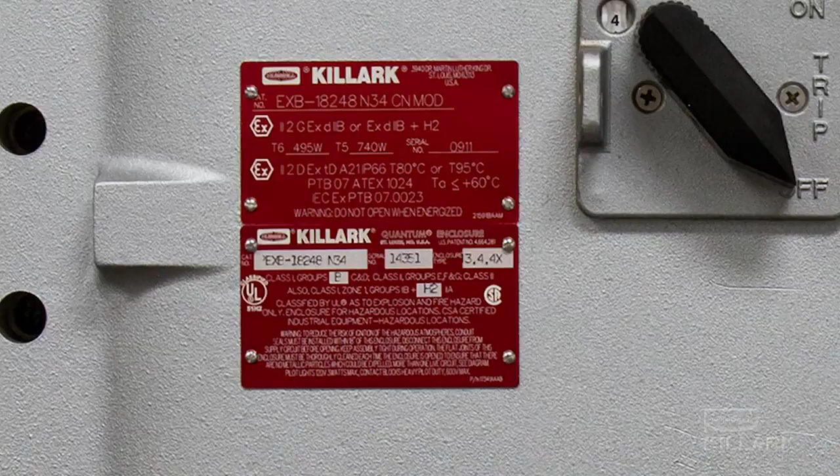Without doubt, quite a range of information is required in order to properly select and specify the protection methods, types of equipment, and precise products to be used in a location that has been classified as hazardous. Certificates and other documentation are absolutely important, but that information must also be easily available directly on the equipment for installation personnel, inspectors, maintenance crews, and field safety engineers. Indelible marking of the equipment to be installed is critical for these needs.

The codes and symbols that have been assigned to each of the characteristics leading up to equipment selection must be assembled into a surface or nameplate marking consistent with standard IEC practice. As a point of reference, traditional North American marking uses a descriptive approach that includes class, division, and group, along with the manufacturer's name, location, and the certifier's mark. Depending on the product and the application, the NEMA environmental rating, as well as operating test temperatures, could also be required.

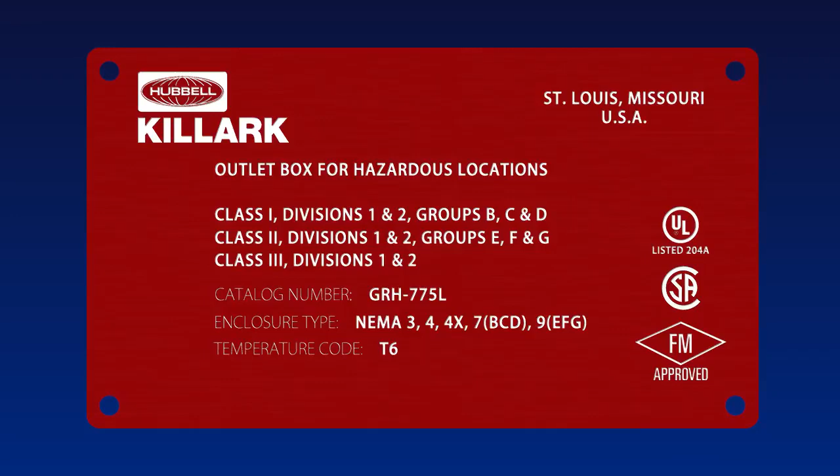One standard, one certificate, one mark is the harmonization goal, and significant progress has been made. Toward that objective, the IEC marking rules employ the codes and symbols in a specific and consistent format to fully describe the location and protection types that distinguish the product and application. But there are still some variations, even a few that may be redundant, in satisfying the requirements for different national and regional controlling authorities.

Starting with the basic IEC marking, EX is used to show that the equipment is explosion protected. This is followed by the protection type, the equipment group, and then the gas or dust material group. Following that string is the temperature or T code. The actual temperature might also be included, if not redundant, with the other marking. Ingress protection, or the IP number, could also be a required part of the nameplate. Of course, the manufacturer's name and location would also be included, as well as the certificate of compliance number.

For products that also carry an ATEX certification, additional marking includes the use of epsilon X within a hexagon to indicate that it complies with the directive. This would be followed by the equipment group, product category, and atmosphere designations. Conforming products intended to be placed in commerce for CENELEC countries must also include the CE mark, followed by the identifier for the notified body responsible for the manufacturer's quality assessment.